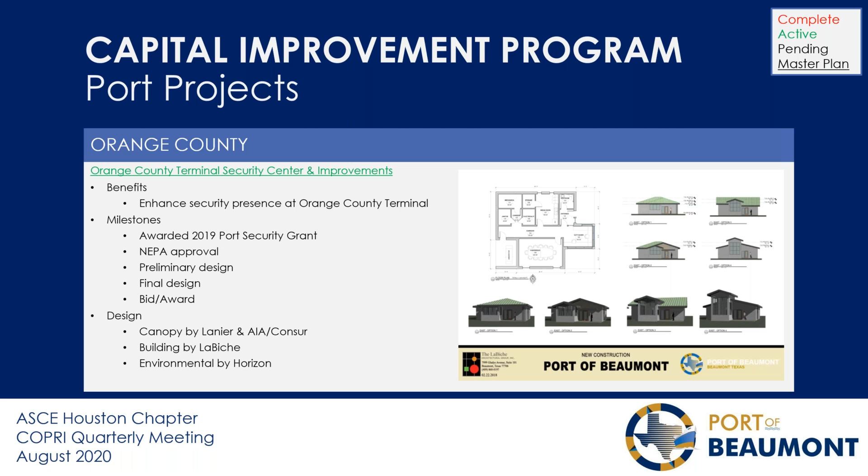The next project we're really excited about, which is in the very early stages of developing, involves some south end property of the Port of Beaumont. The port is dissected north and south on the Jefferson County side by Buford Street, which essentially separates the port's secured Marine Transportation Security Act facility from other properties that we have on the south side.

A lot of this area is either abandoned or vacant, and we are working through the process of acquiring some of these properties in this area that have been vacant for quite some time. It's quite the legal exercise to go through the process of finding the owners or the owner's heirs to get these properties acquired, but we're slowly and steadily getting through that.

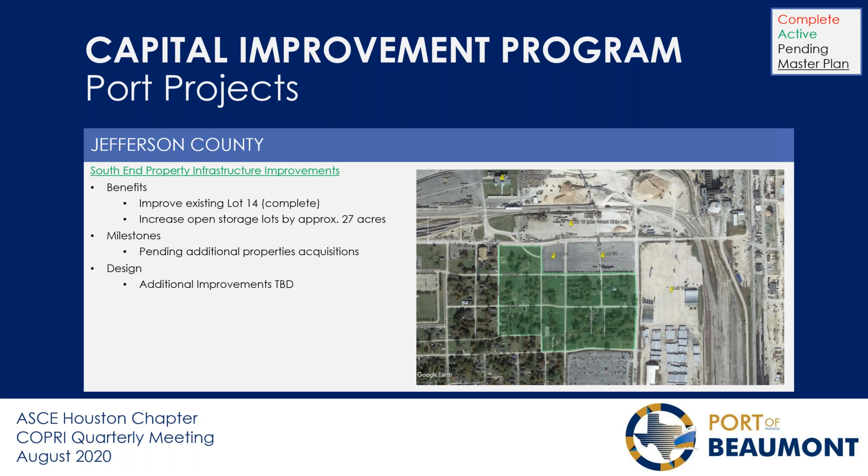What's really exciting to us about this project, as you can see by that green shaded area, is that it's going to allow us to develop a continuous 27 acres of additional open cargo storage on the south end of the port, outside of our Transportation Security Act facility. That means it's got slightly reduced hindrances to access down there, which opens it up to additional types of cargo that we can handle and store in that area.

We plan on resurfacing that lot with roller compacted concrete so we can improve resiliency and see additional bearing capacity for cargo in that lot. It will also go through a substantial renovation to subsurface drainage. We estimate that project to be somewhere in the neighborhood of $3 million.

We're currently finalizing the design with Lanier & Associates through paving and drainage, and we hope to award this project later this year and complete it sometime mid part of next year.

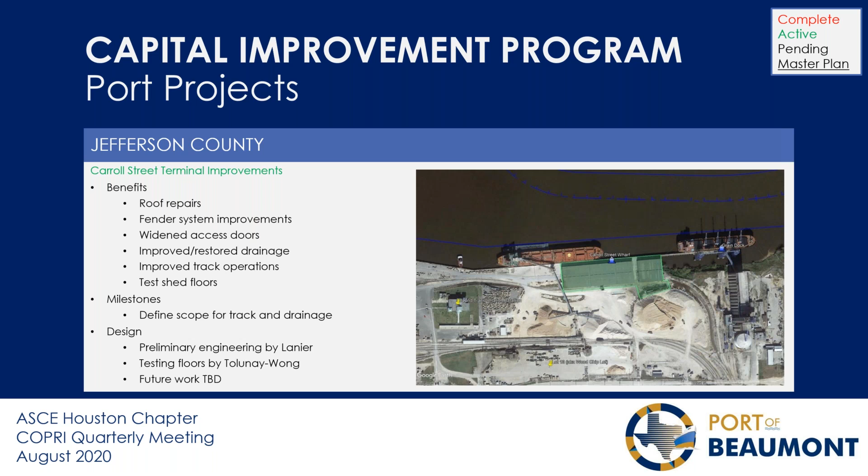Next, we've got another project that is on the books to get added to our capital program within the next few days. This is a parking lot just outside of the port's main gate area and outside of our secure fence. Because of the amount of increased cargo we've seen that enters the port by ship but exits by truck, we have seen a lot of backup on some of the public roads leading to the port's main gate.

These roads are immediately adjacent to our Jefferson County Courthouse here in Beaumont. It's visible from the police department, and so it creates some exposure that is unwelcome by all that truck traffic just outside the port gate. So we're looking to shift that traffic and staging area to a location of property that we've acquired, roughly 3 acres or so, pretty close to the port's main gate, that'll allow us to stage trucks there.

We're going to be looking into some technological improvements to communicate with those truck drivers. There's also going to be some green space out there. A lot of these truck drivers that frequent the Port of Beaumont travel with pets, so there's going to be an area there for them to get out of their trucks, stretch their legs a bit, and use the facilities if they need to. We're hoping it's going to increase some visibility to the port in a positive way when we finish the development of this property, by relieving congestion, but also developing an otherwise unattractive portion of land just outside the port.

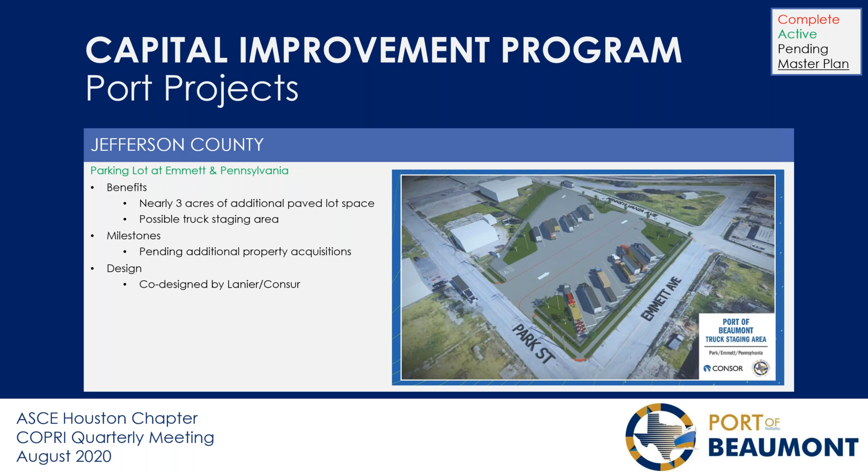Another project that is currently on our master plan and is ongoing is the repair and rehabilitation of a deteriorating grain facility here at the port. Immediately adjacent to our Carroll Street wharf, built in the 1960s, is our grain facility. It is aging. It has been awarded funds through our 2019 BUILD grant, and we're hoping to regroup the concept for this project to not only redevelop it as a grain facility, but also look at its potential use in the future as a multi-purpose dock.

So we're going to be looking to widen the apron, increase the capacity of the structure for live loads, so that it can handle more cargo than just the conveyors and grain that's been handled across it historically.

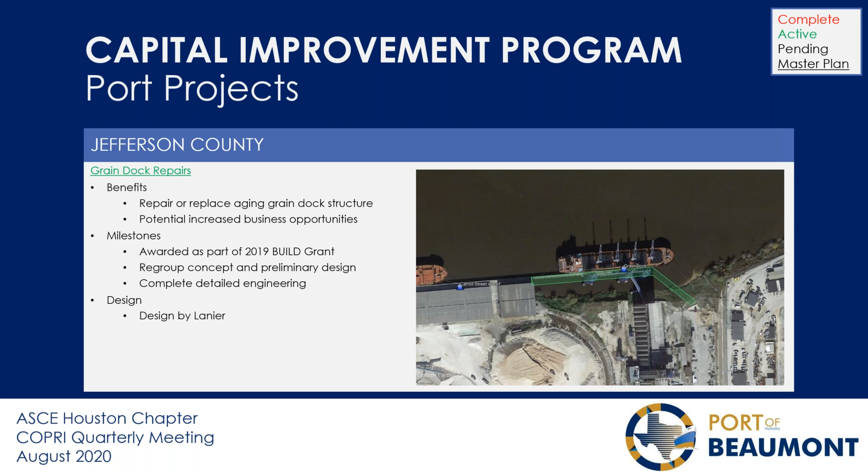The biggest project we have ongoing at the moment is our Main Street Terminal 1 rebuild. We've lost an entire wharf here at the port, roughly 1,200 linear feet of dock, which collapsed in 2011, and it was condemned. So we're going on 9 years without this significant portion of the port being in operation. We awarded the first contract on this project last year. We're roughly a year into Phase A's construction, and it is ongoing by Beaumont contractors out here at the moment.

We look to complete the Phase B design and award that project so that it dovetails into the completion of Phase A, and that Phase B portion of the project is being funded by a 2019 BUILD grant that we received in conjunction with the previously mentioned grain dock repair project.

Next up, we have a bridge. The port's building bridges, and we mean that pun intended.

What we've got here is a bridge that's going to adjoin our immediate waterfront facility near the Carroll Street terminal that I talked about previously, with these south end properties. If you remember the project I first mentioned, developing roughly 27 to 30 acres of final acreage on the south end of the port, this overpass is going to allow cargo traffic to be stored in those areas, bypassing several port rail tracks as well as a very busy public intersection at the corner of Buford and Carroll Streets, allowing that cargo to fly over and get into those south end properties.

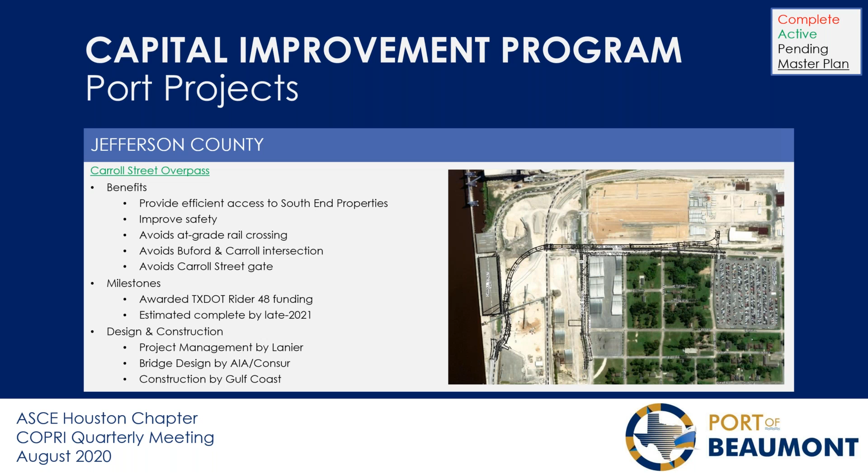I'm going to try to breeze through the rest of these slides. I know I've only got about 5 minutes or so left of my time allotted, but all these projects are exciting, and I could talk about each one of these all day.

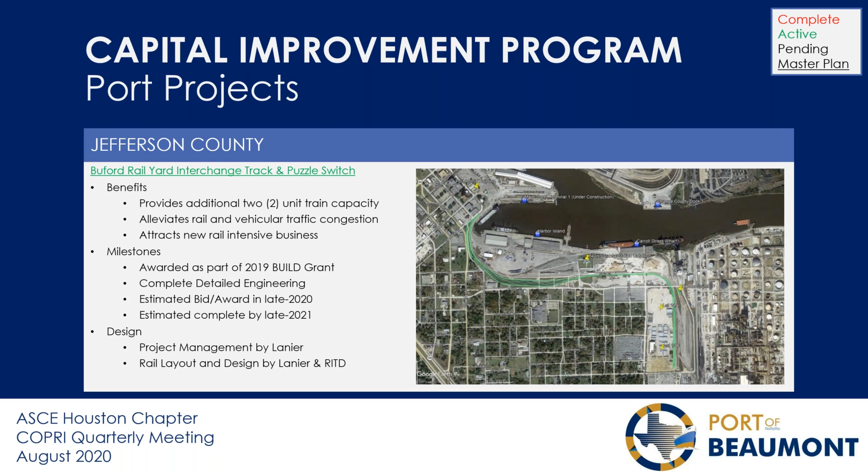This one is one that we're very excited about, wrapping up the design and getting out to bid. This is going to be a major expansion to the port's rail facilities. It's going to increase our unit train capacity by 2 additional unit trains, roughly 240 extra rail cars able to be inside the port for storing and staging cargo. The Port of Beaumont is a convergence of 3 mainline rail carriers, Union Pacific, BNSF, and KCS, all intersecting here in Beaumont. That generates a lot of potential for cargo handling from Beaumont elsewhere throughout the country, but it also can create a lot of congestion. This project's going to help relieve a lot of that.

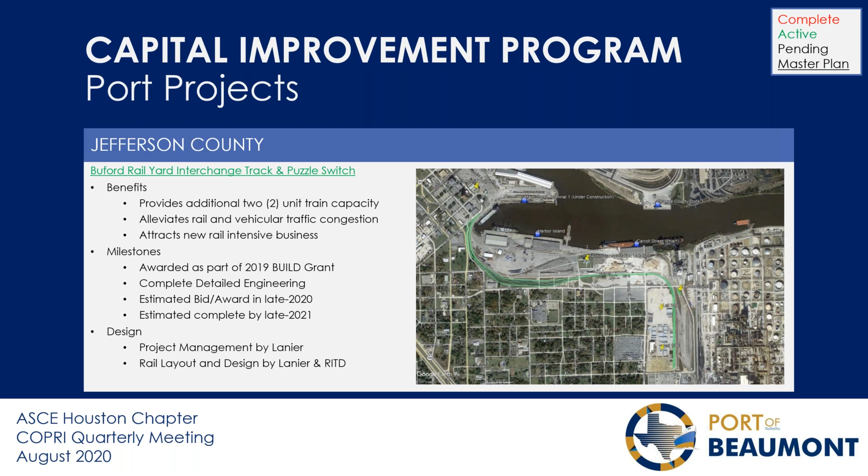We also have a very old, decaying, complicated switching area of the port that is being handled in a multi-stage project to procure, deliver, and install this new puzzle switch to the far east side of the port. We hope we can bid this project out later this year, but the bid is pending, again, part of that BUILD grant funding. This was another project that fell underneath that, but we're hoping to have it completed by sometime at the end of next year.

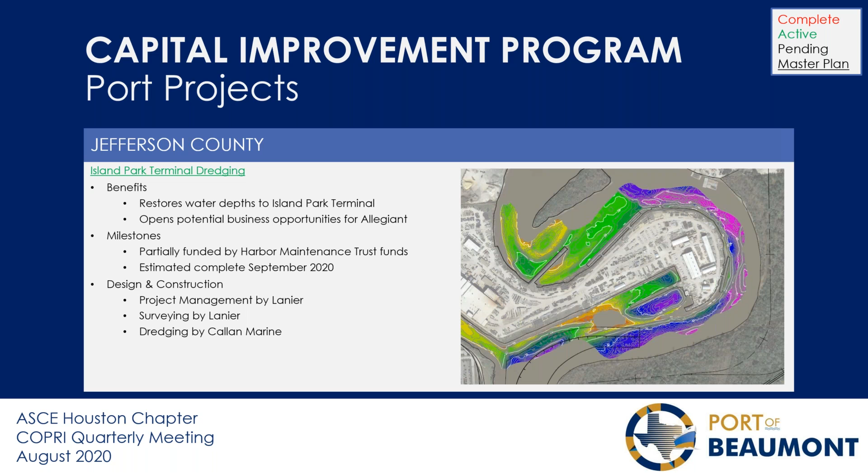As anything on the waterfront goes, we've got to do a lot of dredging. We have a contractor on site now dredging the port's main docks. They've completed that, and they're also dredging a portion of the port we procured after Hurricane Harvey that had an incredible amount of siltation on the south side. If you look at that image, you'll see a portion of that color gradient hydrographic survey that's not even shaded. That's because when the tide's low, you'll see birds sitting out there in the river in that spot. So there's a lot of dredging that needs to be done to restore the potential of this facility to handle barge traffic. Our tenant there at the moment is a major industrial fabricator, so they're anxious to get this berth dredged back out so they can start handling cargo there again.

Looking for other ways to expand the port, we're looking into putting in some fabric tension sheds at some strategic locations as business needs deem worthy. But really, it's our wood pulp cargo. We've seen an incredible increase in wood pulp cargo demand over the last year at the port.

Every shed, every piece of covered area at the port contains wood pulp at the moment. So we've got a few areas where we're looking into putting in a fabric tension building, manufactured by companies such as Rubb Buildings, so we can have something quick to put up and also portable, in the sense that it can be easily taken down and relocated if need be. The business need isn't quite there yet, but we're ready to go with this project should it expand to the point where we need additional under-roof space.

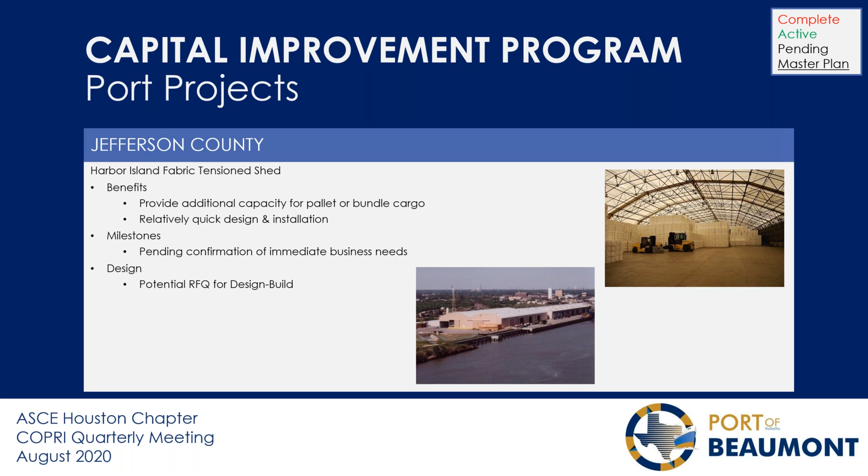One of our tenants here at the port is the Army. The 842nd Transportation Battalion is here inside the port, and we try to keep their grounds looking as nice as we can. One of the north sides of their leased area is experiencing some erosion, which is clogging up some of our ditches and drains here at the port. So we're looking to improve that bank line and stabilize it to prevent erosion and runoff. That's something we're hoping to add to our capital program coming up soon.

Getting in and around the port is important once you're inside the fence, and we've got a road out here that's been patched, paved over, and repaired many times over the years. We hope to add a complete resurfacing project for that road when we go through our next budget cycle with the capital program.

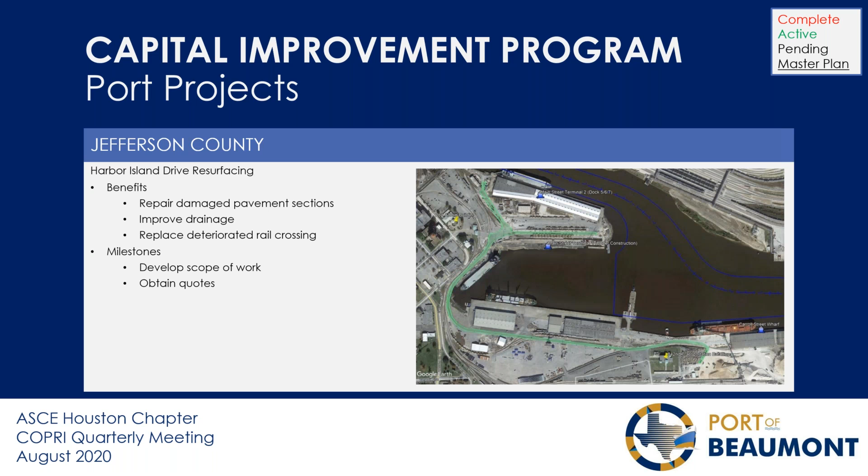We're also looking into how we can capitalize on the deepening of the Sabine-Neches ship channel. This ship channel is intended to be dredged 8 feet deeper over the next 6 years. We're trying to get out ahead of that by studying our existing docks, understanding what they're currently able to be dredged to, and trying to understand how we may be able to deepen them with some modification without reducing the capacity of these wharves. That study is in very early stages of scope development, and we hope to go out for approval of that project very soon.

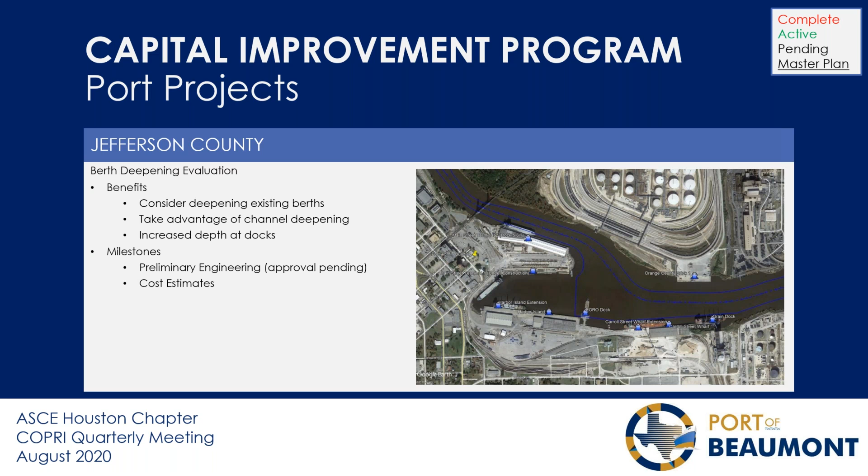We do complete routine 5-year condition surveys at the port. Our last one was completed in late 2018, early 2019. We try to do these every 5 years. We'll probably be coming up on one sooner than that because we anticipate going out for a new master plan pretty soon, and the very first stage of that will be a new 5-year condition survey.

This is a full survey of every component of the port, above and below water: lots, perimeter fencing, mooring and fendering hardware, everything. Nothing gets neglected in this survey because it's a good chance for us to have that 5-year baseline on what needs attention, and we try to knock out the necessary repairs over that 5-year period between surveys.

Part of our public-private partnership includes development of a pipeline corridor with our tenant on the Orange County Terminal, providing connectivity to ExxonMobil. This project is active. Our tenant has secured funding, and we're currently working on a cross-channel pipeline. All permits have been received, and we look forward to getting this connection underway to hopefully see even more throughput of liquid bulk across the Orange County docks.

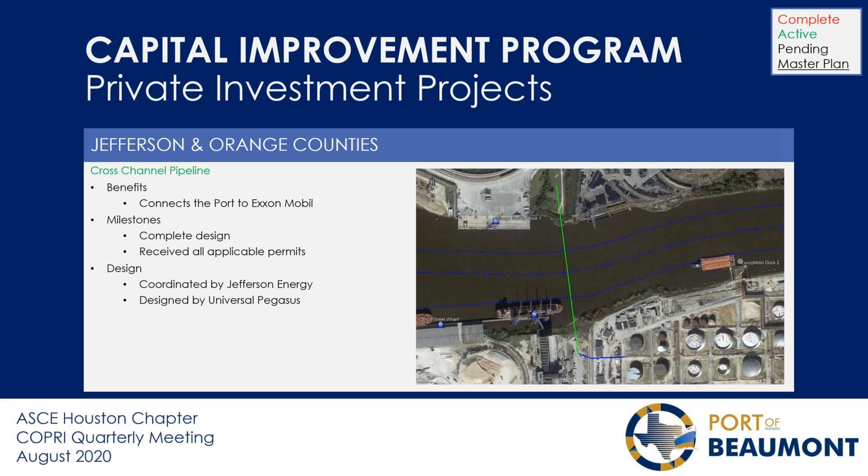But there are still some things that need to be done. We've got a portion of very low-lying rail track at the port that eroded and was compromised by Harvey. We're working to secure final Corps of Engineers permits for that project so we can get it out to bid. We've also got a project underway to restore a shoreline that deteriorated after Harvey, and I've got a few pictures of those projects following.

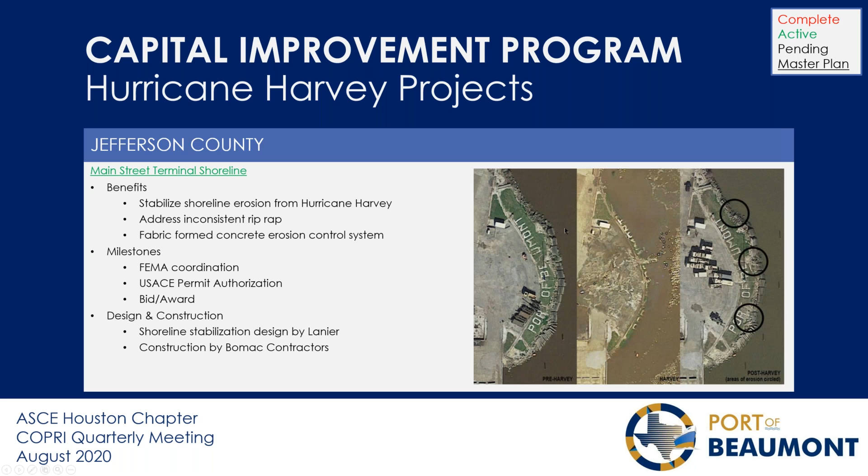The shoreline that deteriorated is on a peninsula at the end of our Main Street terminal facility, currently under repair. Floodwaters got high enough, and the current rushing around that bend deteriorated some of the riprap that was there previously. This project is going to stabilize that shoreline with a new fabric-formed concrete erosion control system, not only to restore what we lost but also to create a more resilient shoreline to prevent further erosion in the future.

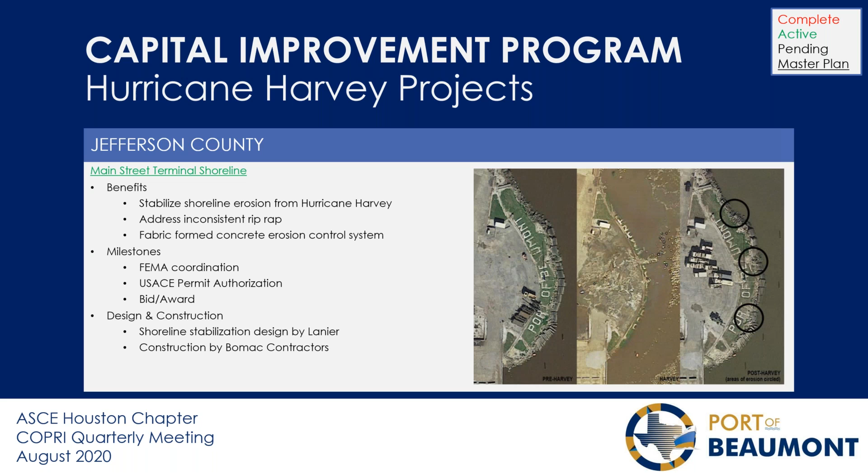So that's kind of a whirlwind breeze through of what we've got going on here at the port. I hope you found that interesting. I'll look forward to any questions you might have. If you'd like to reach out to me or the port, you can find us on Twitter, Facebook, and LinkedIn. I have a LinkedIn account as well, and that's my email address there if you're interested and want to discuss anything that I went over further.

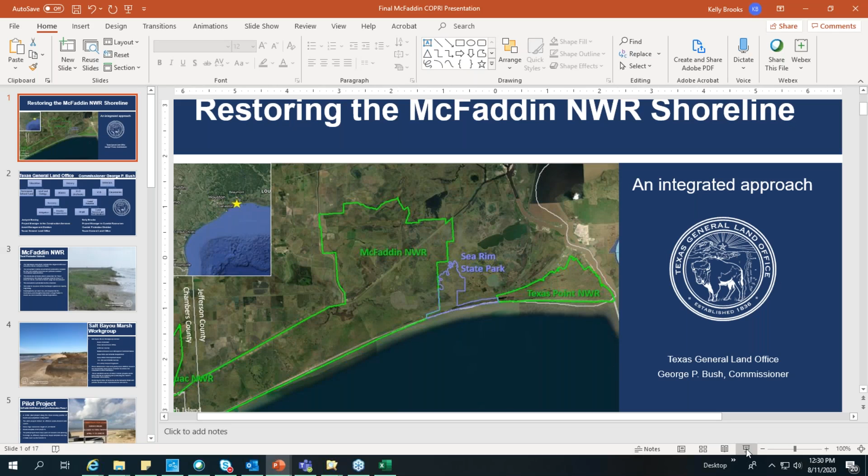Okay, can everyone see my screen? Yes. Awesome. All right, good afternoon, everyone. As Philip said, my name's Kelly, and I work at the Texas General Land Office in Coastal Resources. My colleague Jolynn Barclay and I will be presenting a project on restoring a section of shoreline along the McFaddin National Wildlife Refuge.

Just to give you all some background, the Texas General Land Office is currently under the leadership of Commissioner George P. Bush. The GLO is the oldest state agency in Texas and is very unique in that the GLO oversees many different types of divisions. The GLO helps fund Texas public schools through the Permanent School Fund, operates the Alamo and archives of land grants that date back to the 16th century, helps provide benefits to Texas veterans through the Veterans Land Board, manages state lands through oil and gas and public lands leasing, helps Texans recover from natural disasters such as hurricanes or flooding events, and of course, we manage and protect and restore the vast Texas coast.

As Philip said, I'm currently a project manager in coastal resources, and Jolynn is a project manager in construction services. Now, as stewards of the natural resources of Texas, the Coastal Resources Division oversees and implements various programs dedicated to planning, leasing, coordinating, protecting, and funding restoration. These programs focus on master planning in coastal communities, assessing damage post-oil spill, managing beaches and dunes, organizing beach cleanups, monitoring water quality of Texas's recreational beaches, and ensuring federal consistency.

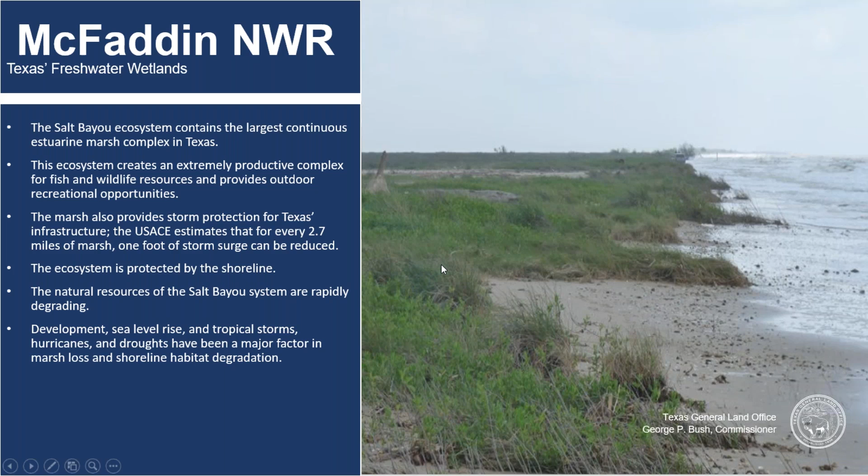This photo does a really great job of showing those clay outcrops and just how severely eroded the beach is in this area. You can see that really thin veneer of sand and then just those giant outcrops of Beaumont clay.

To combat the extreme losses in the ecosystem, a group was formed called the Salt Bayou Marsh Work Group. It includes members from Ducks Unlimited, the Texas General Land Office, Jefferson County, NOAA, Texas Parks and Wildlife Department, Texas Water Development Board, U.S. Fish and Wildlife Service, the refuge system, and the U.S. Army Corps of Engineers.

These stakeholders met yearly since 2000 to research and develop the best course of action to restore the ecosystems within the Salt Bayou system. These plans of action include restoring the marsh's freshwater connectivity, and the final piece is restoring that shoreline, which would provide a final layer of protection to the marsh along 20 miles of shoreline.

Because restoring 20 miles of beach through nourishment and dune restoration can be extremely ambitious and expensive, we selected a portion of beach for a pilot project that was the most affected by erosion to start with.

All right, Kelly, thanks. So the 3-mile pilot project was completed in May of 2017. It was constructed in a portion of the site most prone to erosion, and it utilized an offshore paleo channel for the sand source. The basic design was for the dune ridge restoration height to be plus 8 feet in NAVD, and the beach template design used 37 cubic yards per linear foot of beach quality sand.

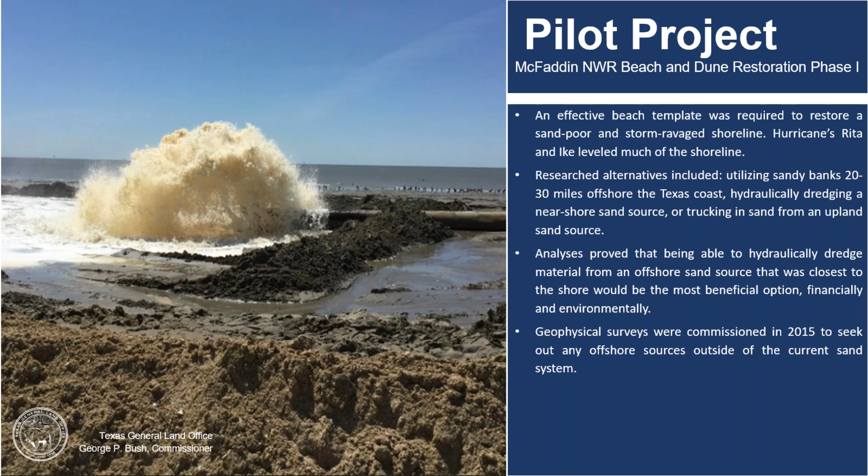Geophysical surveys were commissioned in 2015 to seek out offshore sand sources. There's the dredge during the project. They narrowed it down to a sand source about 1.5 miles offshore, interpreted to be a paleo channel from when sea level was lower than present day.

While paleo channels can be great producers of beach quality sand, they can also contain prehistoric cultural resources that are subject to protection under federal and state regulations.

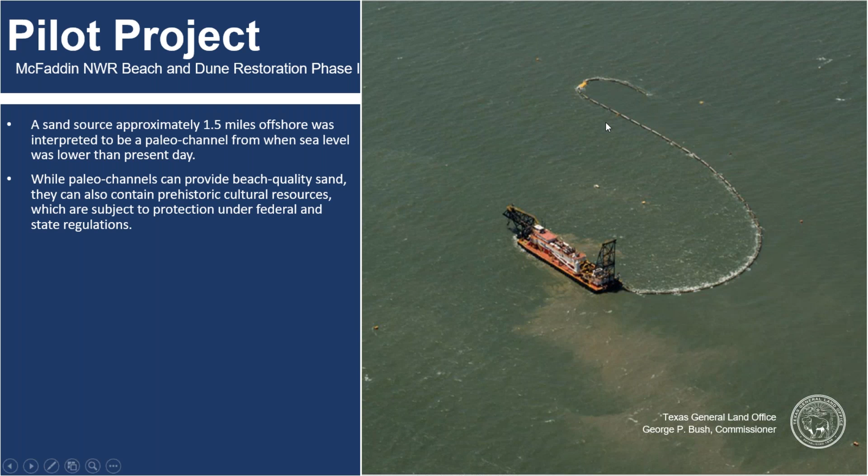Kelly, we'll go to the next slide and I'll let you talk about archaeological monitoring. Since the shoreline of McFaddin is a dedicated prehistoric terrestrial site, it's one of the earliest known and most important sites on the Texas coast for these artifacts. You can go there on any day, and beach gatherers have been finding prehistoric material forever. Everyone always posts stuff along these THC sites, and you can go there yourself and try to find something. The artifacts recovered include lithic scatters, mammoth tusks, and Clovis points, reflecting both Eastern and Western traditions.

The source of material was interpreted to be from that offshore site, where Paleo-Indian, archaic, and early woodland populations would have occupied during times of lowered sea level. This historical status resulted in a very vigorous amount of archaeological studies onshore and offshore to ensure no artifacts were harmed during dredging or construction.

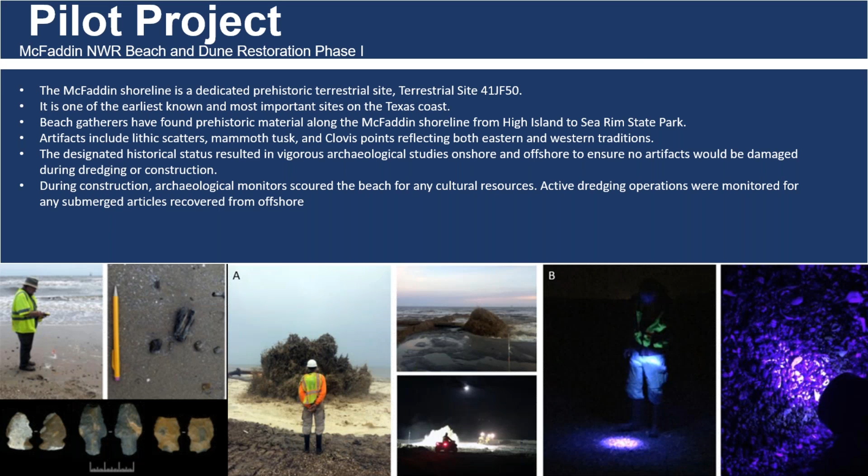Since we are on a national wildlife refuge, and because we are stewards of Texas's natural resources, we are very interested in monitoring and protecting our biological resources, like species that inhabit the marine environment close to the construction site and onshore. Monitoring also included biological monitoring to ensure any living marine animals or species inhabiting the construction area were not harmed or disturbed during construction.

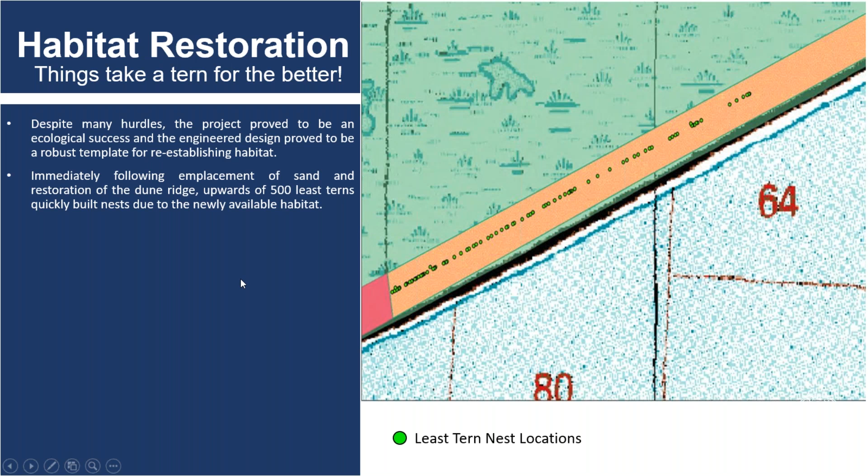This monitoring also allowed us to get ample data that proved habitat restoration can be immediately successful for coastal species. This graphic shows least tern nest locations, and least terns are a coastal bird. Roughly after a month of placing our beach template, we had upwards of 500 least tern nests, activity that hadn't been recorded in this area probably since Ike.

Here are some of those little baby terns up on the beach. Super cute, really great sight to see. While this was really welcoming news and great to see that habitat restoration works and that species can use this, it also meant that we couldn't plant our newly restored dune until the terns were done nesting.

Once the terns were done nesting, we actually had some winter weather also complicate things, which was very strange in this upper Texas coastal area. We got to solicit planting roughly 10 months post-placement.

The plants were spaced 2 feet apart in rows of 5 from the foredune up to the dune crest, composed of a species mix of bitter panicum and sea oats. Because the pilot project was done in the middle of this 20-mile stretch of severely eroded habitat, and it's very highly inaccessible, we didn't require additional watering or survivability as part of the solicitation. So it was basically just: we're going to get it planted and hope for the best.

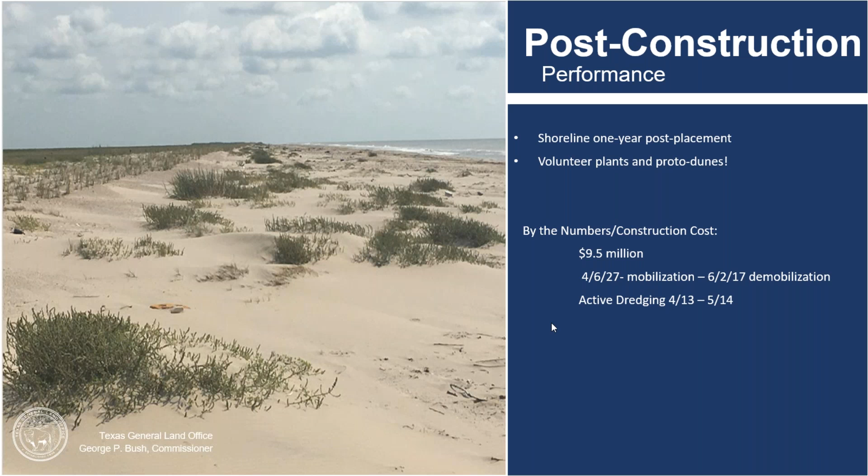So we always want to know, did the design template work? Shortly after placement, we actually had a couple of pretty momentous storms make landfall in and around the project area. About a month after placement, Tropical Storm Cindy made landfall right to the east of us in Louisiana, immediately east of us at Holly Beach. Then shortly after that, Hurricane Harvey made landfall in August. Harvey made landfall in the coastal Bend region and then moved east to the upper coast, where it became largely a watershed and inundation event with lots of flooding.

But anytime we have those kind of flooding events, we have storm surge, and then a large amount of water has to exit that upland area and go back out to sea, which can wreak havoc on any coast. So this gave us some really good data to see how our template actually recovers from that frequency of storms. We had a tropical storm and a hurricane to test it against. This picture is after both events, and you can see the shoreline held up very well and had enough material to naturally recover.

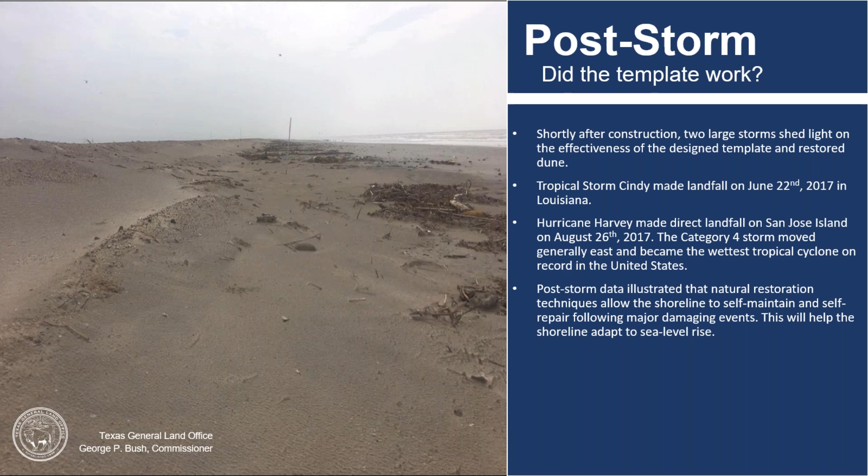So restoring 17 miles is proving to be an extremely ambitious task. That includes finding enough funding for the project. We had to find more beach quality sand to complete the project. We had to finalize design for the remaining 17 miles, and we had to amend the current Corps permit to allow us to obtain more sand offshore and also place the material and do all the biological coordination to make sure we could comply with everything.

Stakeholders in these decision-making and funding processes include Jefferson County, U.S. Fish and Wildlife Service, the McFaddin National Wildlife Refuge, the Texas General Land Office, the National Fish and Wildlife Foundation, the Deepwater Horizon Natural Resource Damage Assessment Trustees, otherwise known as NRDA trustees, and the Restore Council.

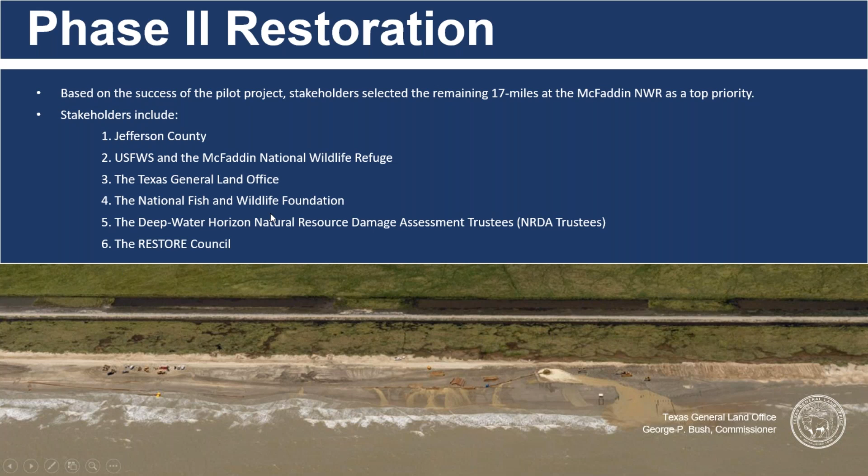For the next phase, the template was designed to be dependent on the severity of erosion and the need for habitat restoration. We have that template and project area divided into 3 different fill segment areas. Fill segment area 1 and 2 straddle the pilot project and are in most need of beach quality sand and habitat restoration. Fill segment 3 butts up to Texas's Sea Rim State Park, and that area is slightly more stable and does not require as much template.

So for fill segments 1 and 2, we're looking at a goal of placing upwards of 40 to 50 cubic yards per linear foot. And for fill segment 3, we have a goal of placing 10 to 20 cubic yards per linear foot.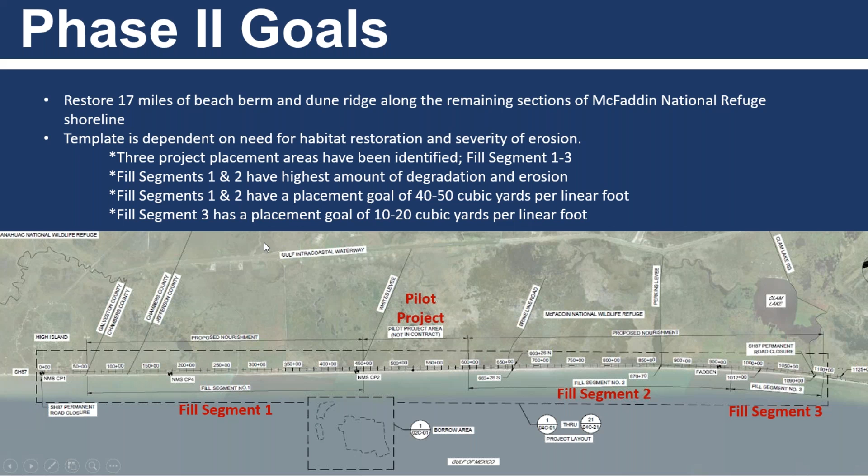With that, this project, the pilot project and this upcoming project, has really taken a lot of work and a lot of people in every organization, federal and state and within the GLO, and local communities helped, especially Jefferson County, Judge Branick and team, Tim Cooper and Douglas Head in the Chenier Plains and McFaddin Refuge System, former project manager Carla Cartman in Coastal Resources, and of course all the little things no one sees behind the curtain at the GLO, including our procurement directors, contracts management, financial management, our legal heroes, community development recovery, and all of our funding stakeholders that have dedicated funds to ensuring this next 17 miles is fully restored.

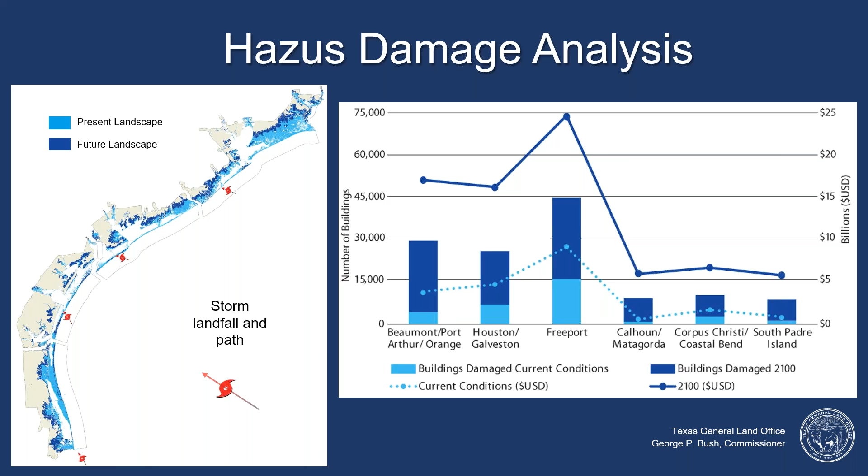Taking a look at some of the modeling conclusions: we can conclude that today's wetlands are going to be lost due to relative sea level rise if these habitats are not allowed to transition upland. This will decrease our ecosystem resiliency and increase the vulnerability of our natural and built environments. If no mitigating actions are taken, our coastal communities are going to become more vulnerable to these minor hurricanes because of relative sea level rise and the land cover changes associated with it.

And that's going to allow storm surge to penetrate further inland. So we can also conclude that ecosystem conservation and restoration projects, coupled with responsible development, are going to be very important and critical facets for increasing our overall resiliency. Those are goals that our resiliency master plan is attempting to work toward.

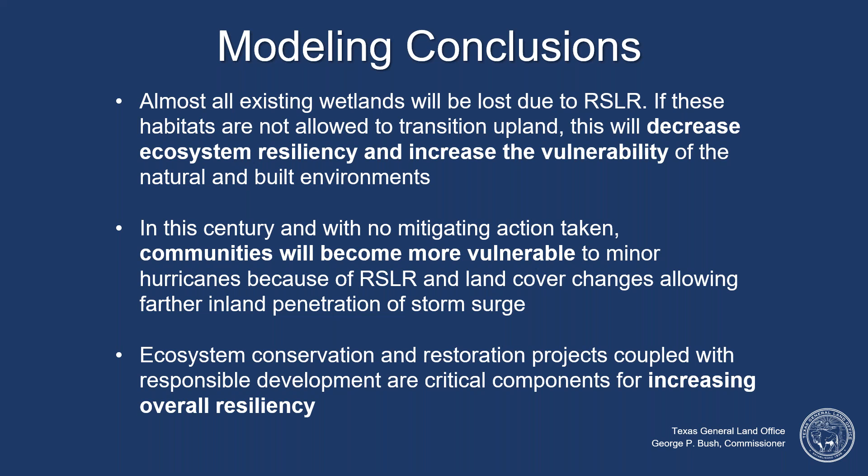Taking a closer look at the progress of Tier 1 projects in the Upper Coast, or Region 1 as we call it in our planning process: out of those 49 Tier 1 projects in Region 1, 28 are currently in progress, and 7 of those have been recently initiated or have taken their first steps since the issuance of the 2019 plan about 18 months ago. I'll leave this graphic up so you can see the location of these projects, and we're about to dive deeper into specific projects and the progress we've seen so far.

Here you can see in table format those 28 projects that are currently in progress in Region 1, with the recently initiated projects highlighted in orange. Here's a summarization of some project updates that the GLO is not directly involved in as much, and then I'll launch into some of the projects that the GLO is more involved in.

Over at Willow Lake along the Gulf Intracoastal Waterway, Project R1-12 is slated for construction in the near future. The Salt Bayou Siphon Project, R1-41, is estimated to have been completed by this point—we'll have to check in and get another update on that.

The Coastal Heritage Preserve on Galveston Island, Project R1-35, is being driven by an organization known as Artist Boat. They have a willing seller and are actively working on acquiring 120 acres in Anchor Bay, which will bring the total acreage of conserved land to 810 acres in the Coastal Heritage Preserve.

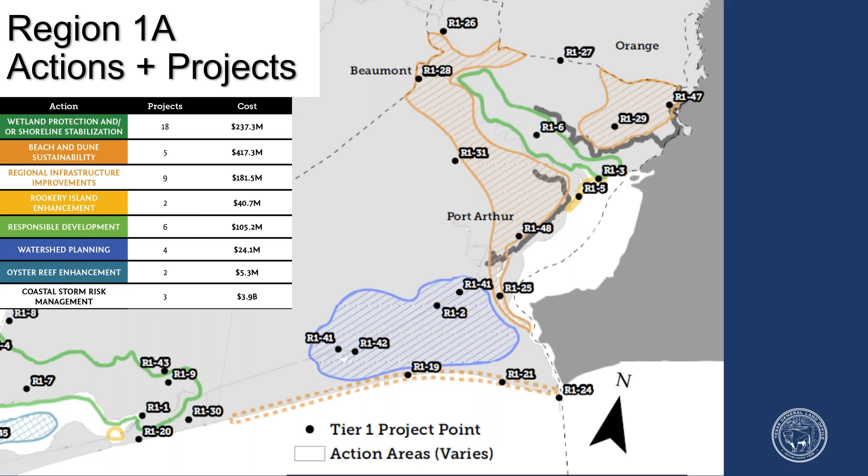Looking at Region 1B, we can see the large-scale action associated with oyster reef enhancement in Galveston Bay, and the wetland protection and shoreline stabilization actions outlined in green along the GIWW in West Bay and along the Brazoria National Wildlife Refuge, farther to the west.

Some shoreline projects of note that CEPRA is involved in this region include final design and construction of 9,000 feet of breakwaters along Trinity Bay, as part of the Gordy Marsh Protection and Restoration Project, R1-4, just off the map to the right side.

CEPRA is also working on the permitting and construction of 7,500 feet of breakwaters on the bay side of Galveston Island State Park, largely funded through the National Fish and Wildlife Foundation. That's Project R1-14. CEPRA is also working on 11,000 feet of breakwaters to protect a breach of the Oyster Lake shoreline on the west side of West Galveston Bay, Project R1-17.

NRDA trustee projects in Region 1B include Greens Lake Shoreline Protection and Wetland Restoration, Project R1-15. The shoreline protection portion is funded by National Fish and Wildlife Foundation and is in the early engineering phase, in collaboration between Ducks Unlimited and Galveston Bay Foundation. The wetland restoration portion is included in the Restore Act funded portion of the project, to develop a marsh restoration project through beneficial use of dredge material.

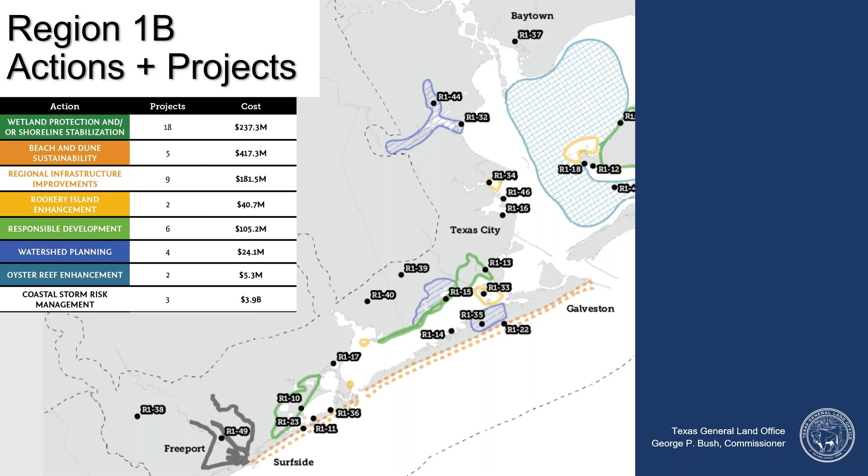Those three levee improvement projects in Region 1 push the project cost total in this region to the highest of the four regions across the coast. Just with those three storm risk management projects, they total $3.9 billion in funds needed.

So as I said, we have issued 2 iterations of our plan in the past, 2017 and 2019. We're going to be moving into a 4-year planning cycle now, and the next iteration of the Texas Coastal Resiliency Master Plan will be released in 2023.

In the meantime, we're focused on implementation efforts that include engaging more stakeholders, educating through the development of various tools that work to empower coastal communities, residents, and industries. We're continuing to expand the scope of this planning effort to help drive and inform priorities of other agencies, working collaboratively with agencies such as TxDOT, Texas Water Development Board, and others to be sure we can align our goals and priorities and understand where we as a state can boost resiliency into the future.

You can find all of our planning documents, technical reports. We have some really cool project maps and modeling data viewers. Those are very popular - you can look at those per region, toggle on and off different layers, look at action polygons, take a look at project footprints, and look at our expected sea level rise, landscape change, and storm surge inundation areas into the year 2100 on those modeling data viewers.